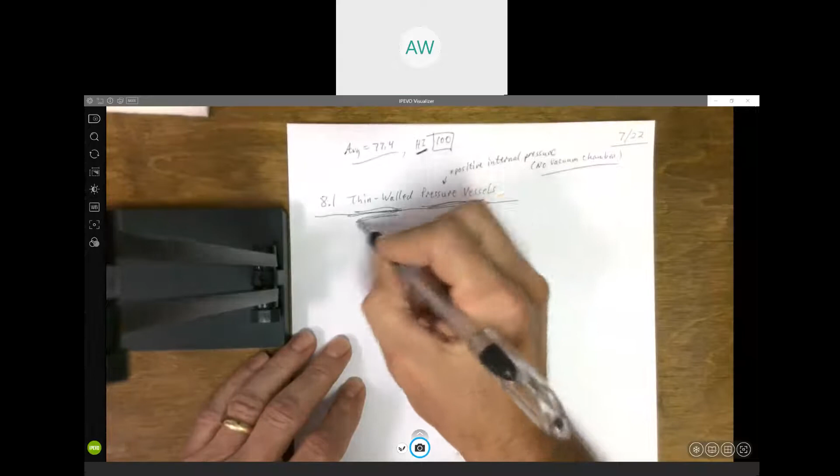Other thing, the formulas that we're going to come up with in just a minute only apply to what we refer to as thin-walled pressure vessels. These are pressure vessels where the thickness is much, much less than the size, the radius of the pressure vessel. In fact, I think this particular textbook uses the ratio R over T, and it's got to be greater than or equal to 10.

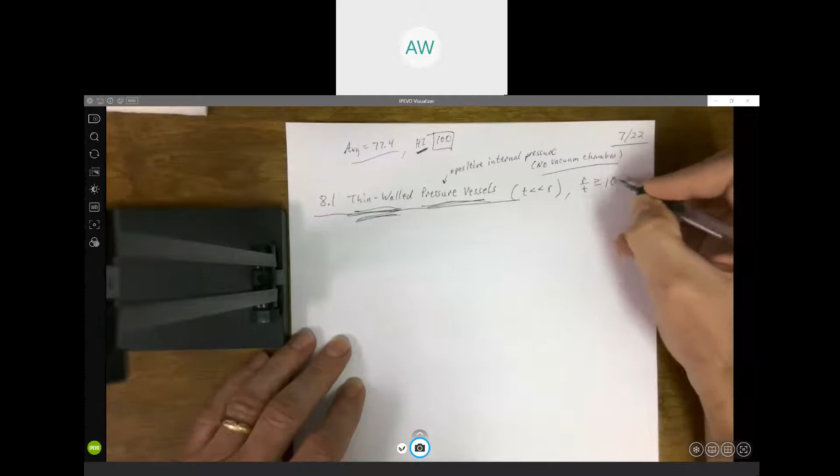So we'll see in a minute, R here is the inner radius of this pressure vessel. It's got to be at least 10 times the thickness for these formulas to apply. And in fact, I think there's discussion in the book about this.

I think the whole purpose in limiting ourselves to thin walls is that if the wall is really thin compared to the size of the pressure vessel, the stress doesn't change much from the inner surface, the inner wall, to the outer wall. If you start getting really thick wall, then there is a significant difference between the stress on the inner wall and the outer wall. And those types of pressure vessels are analyzed differently than the formulas that we're going to come up with and use.

But most pressure vessels are thin-walled, meeting this criteria, because we'll see in order to keep the stresses below our allowable, the thickness doesn't have to be that great. A really thin wall can withstand a great deal of pressure. And these are very common types of structures.

You see pressure vessels all over the place. If you've got a gas grill with a liquid propane bottle, that's a pressure vessel. If your house has gas, you've got a big gas storage tank at your house, that's a pressure vessel. If you live in town and just have gas lines, well, turns out any kind of piping is just a long cylindrical pressure vessel. So piping and cylindrical pressure vessels are essentially the same.

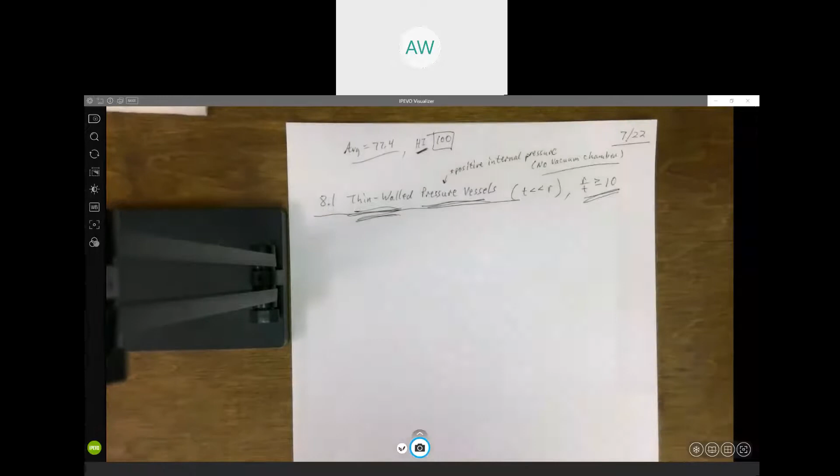You're going to see we're going to come up with some really nice, short, easy formulas that we can use to calculate the stress in these pressure vessels. So I mentioned we're going to look at two. The first one we're going to talk about is cylindrical.

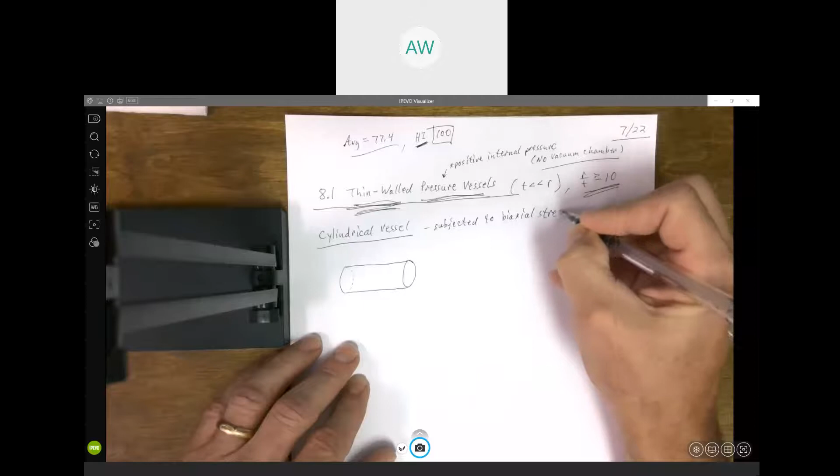So as the name implies, it's a pressure vessel that's shaped like a cylinder. Now, we're going to see with all these pressure vessels, these things are subjected to what we call biaxial stress. So that implies there's stress in two directions, right? We're going to have stress in two axes.

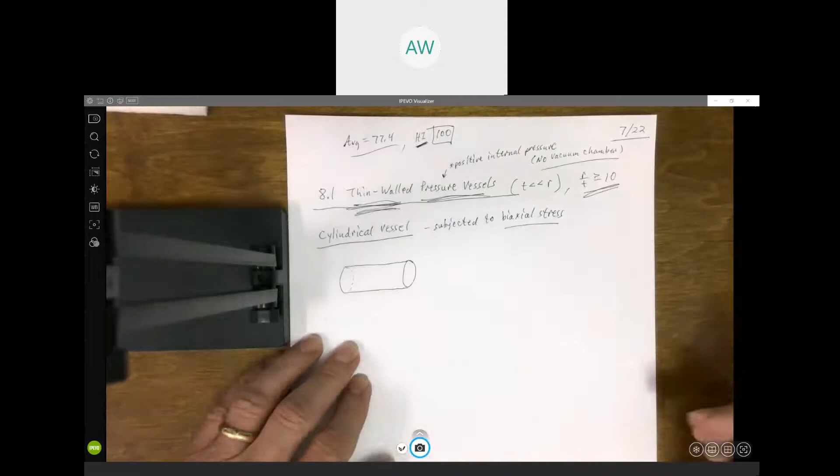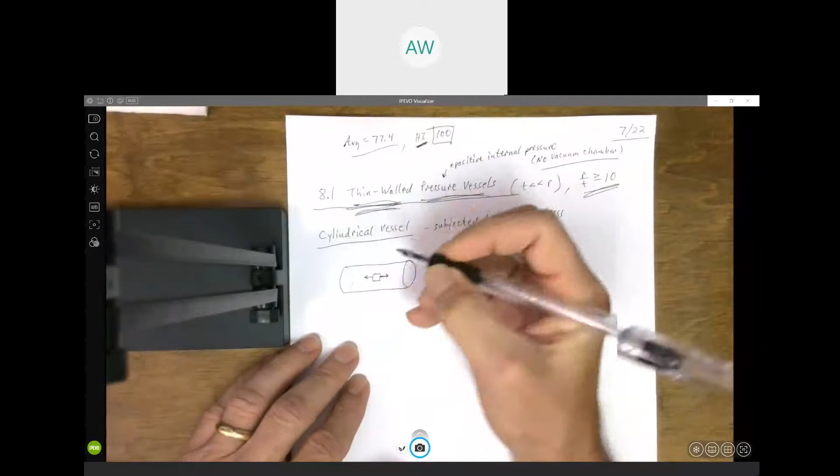And so if you looked at a little element, a little piece of the side of this pressure vessel, you're going to see a stress in the axial direction. We'll denote sigma A. This is the axial, or the stress in the longitudinal direction.

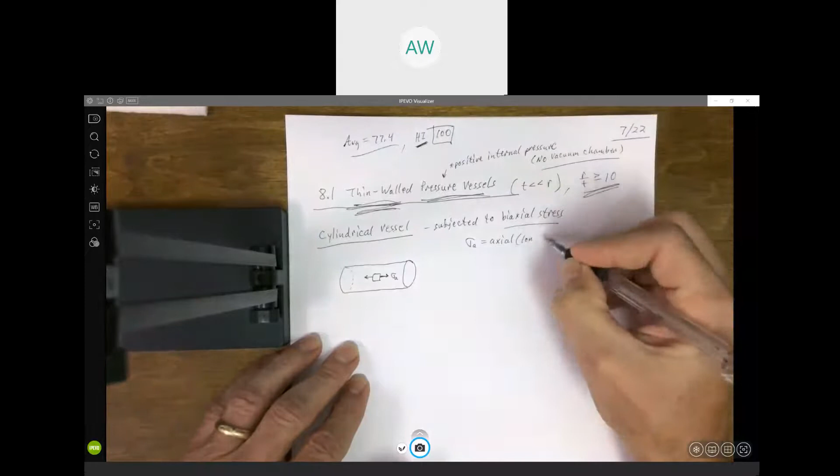If you got a cylindrical vessel like this and you put pressure in it, that pressure is trying to pull this thing apart this direction. You got pressure pushing to the left, you got pressure pushing to the right. It's trying to basically pull this thing apart longitudinally. And the stress in that direction, we're going to call the axial stress.

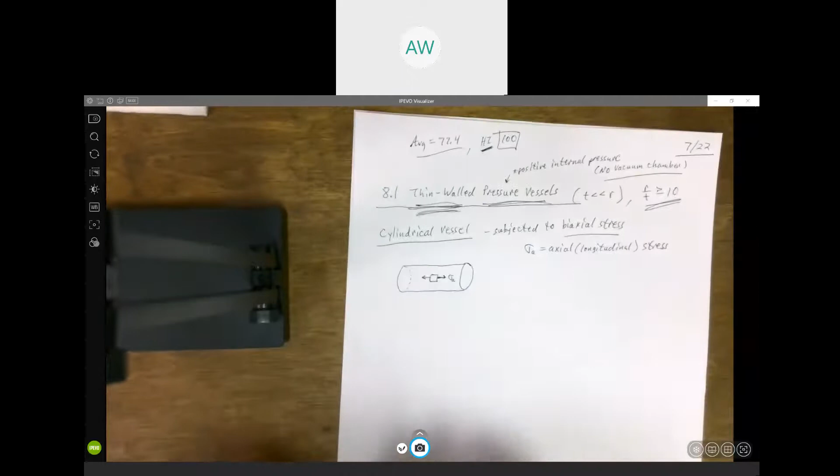But if you have pressure in here, it's also trying to, maybe I'll use two hands, blow it apart in this case, the way my picture's drawn, in the vertical direction. You got pressure in here, it's trying to basically push that top up and push the bottom down.

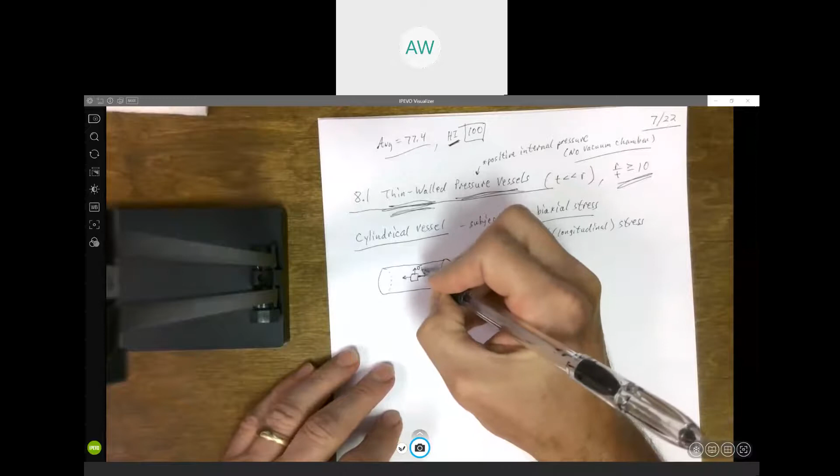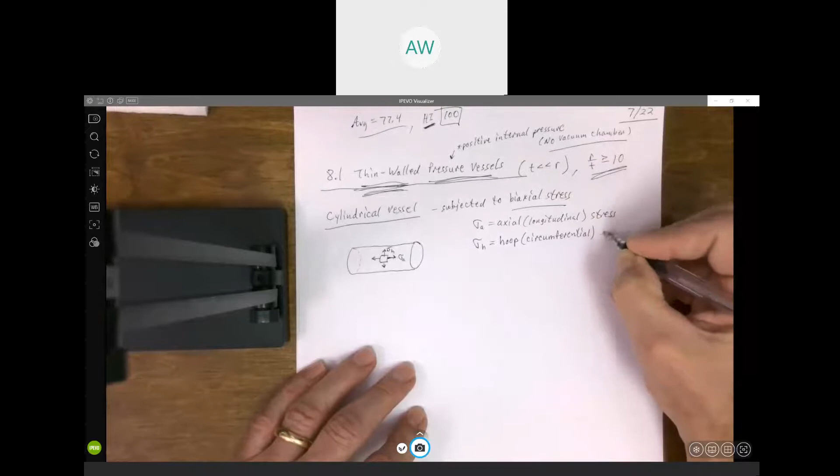And that stress, in what would be referred to as the circumferential direction, which is very long and hard to say and hard to write, so this is typically referred to as the hoop stress. But if you prefer, you can call it the circumferential stress. So when you put a pressure inside this cylinder, it's trying to basically blow this thing apart in two directions. And these two stresses, that's what we're going to try to come up with a formula that will allow us to calculate those stresses in the longitudinal direction and the circumferential direction.

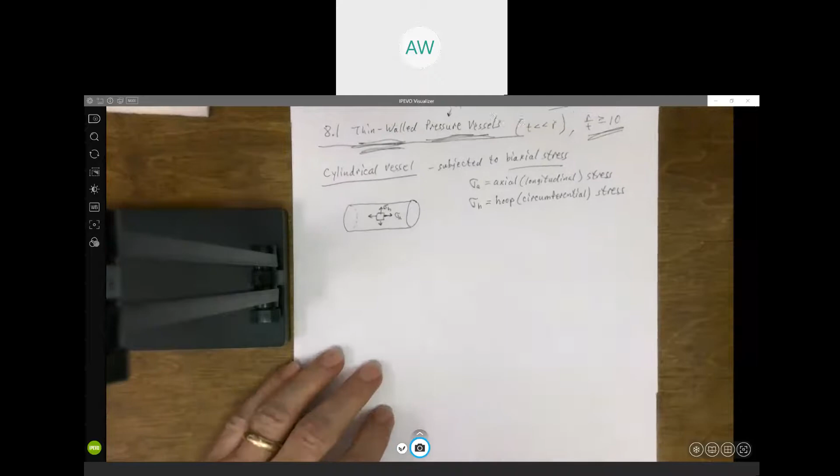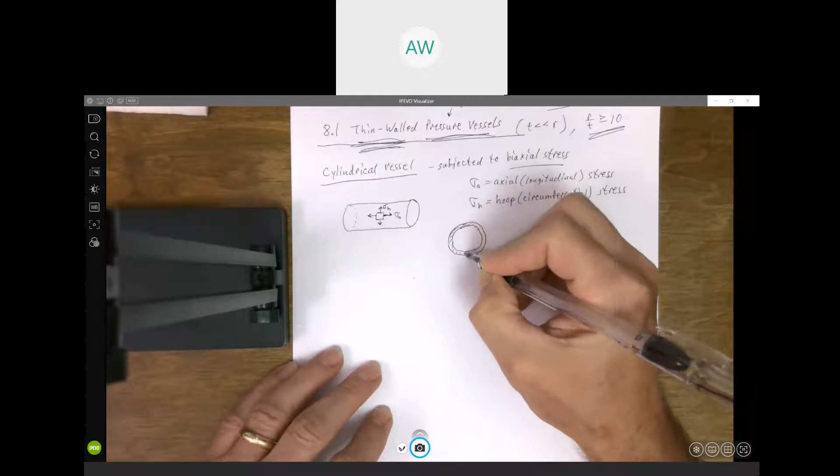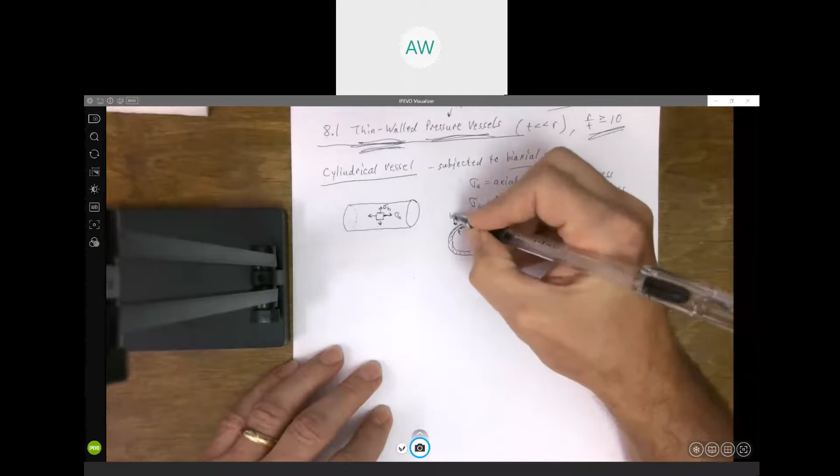Now, here's where the thin wall part of this comes into play. If you look at the cross section of this cylinder, we're going to have the inner radius we're going to denote with R. The wall is going to have some thickness T, and this would be the area of the wall.

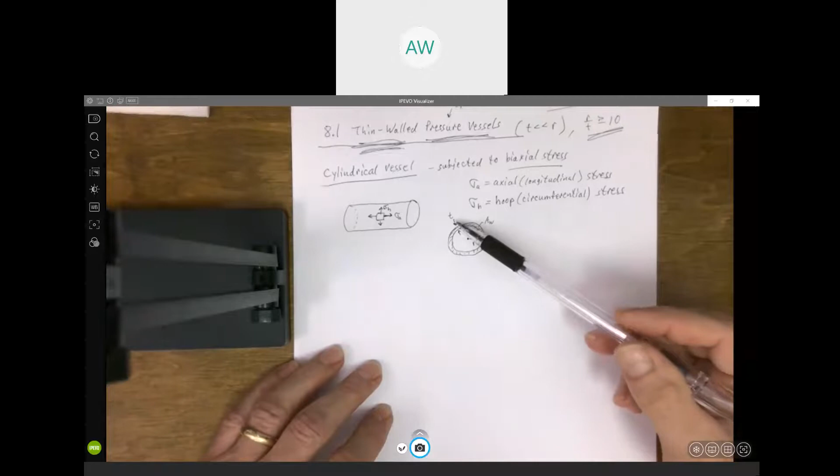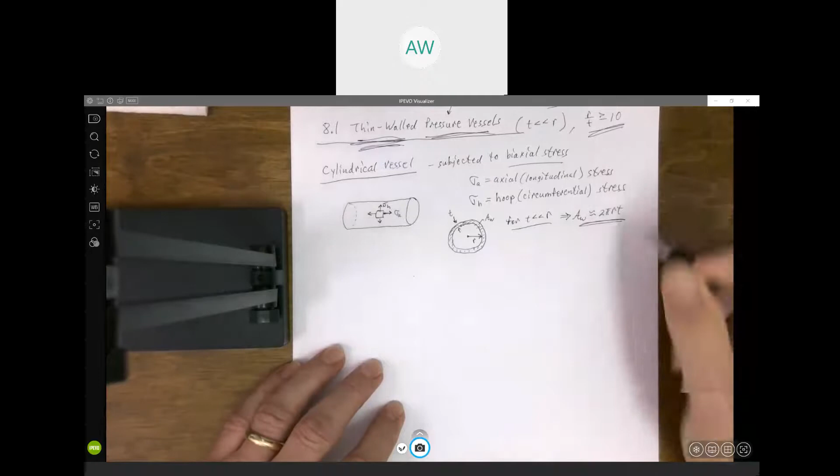Now, to get the actual area of that wall, what you could do is take the area based on the outer radius and then subtract the area based on the inner radius, and the difference would be the area of that wall. But here's where, if the thickness T is really small compared to R, then we can approximate. So if we've got a thickness that's much, much smaller than the radius, the area of the wall is going to be approximately equal to the circumference of the inner circle times the thickness, or just 2 pi r t. This formula we're going to come up with is based on this assumption, this approximation. That's why the formulas we get start to break down as the thickness gets bigger.

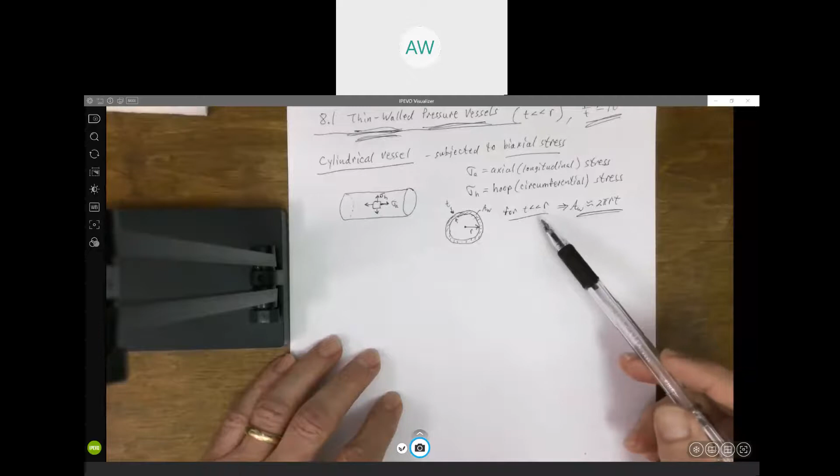Now, remember when we talked about normal stress, we said normal stress was F over A, I'm using F instead of P because P here we're going to start using for pressure. But we could get the force by multiplying the stress times the area. We've done that a couple of times when we were deriving some other stuff. So if you've got a stress acting over a surface area, then the equivalent force associated with that stress is just the stress times the area that it acts on. So it's exactly what we're gonna do here.

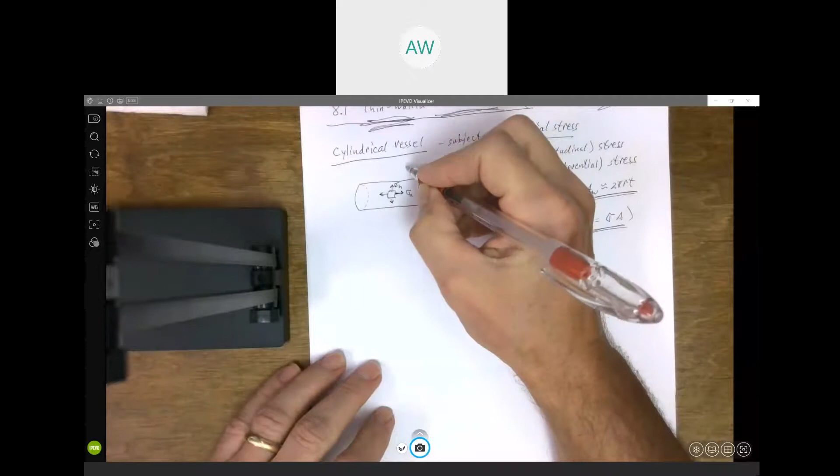We're going to cut this cylinder, if we cut it in this direction... drawing circles are hard, especially when they're hard for me. So I'm cutting this, and I'm looking at the right side of where I cut it. So we've got this, this is the area of the wall, and that's where we're going to have this axial stress.

We're going to have this normal stress, sigma A, acting on that area. So the force associated with that, I'll call force sigma, force due to stress, would just be whatever that axial stress is times the area of that wall. That's the force associated with that stress.

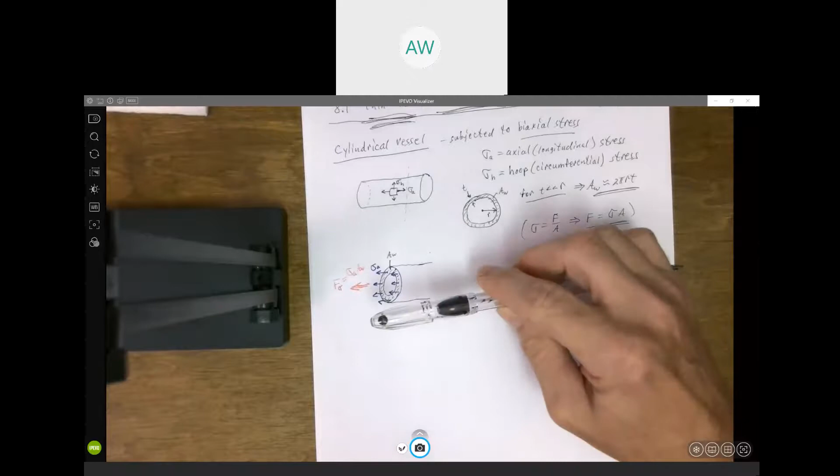Now back here on this back end, if you've got a cylinder, I can rotate it this way so you can see this end, but then you couldn't see the bottom surface. Or I could rotate the other direction and you could see this surface but not that one. That's what happens in reality, but I want you to be able to see both surfaces. I know somebody's thinking there's no way we could actually be seeing both ends of this thing. I'm agreeing, but I'm drawing it so we can see both ends for visualization purposes.

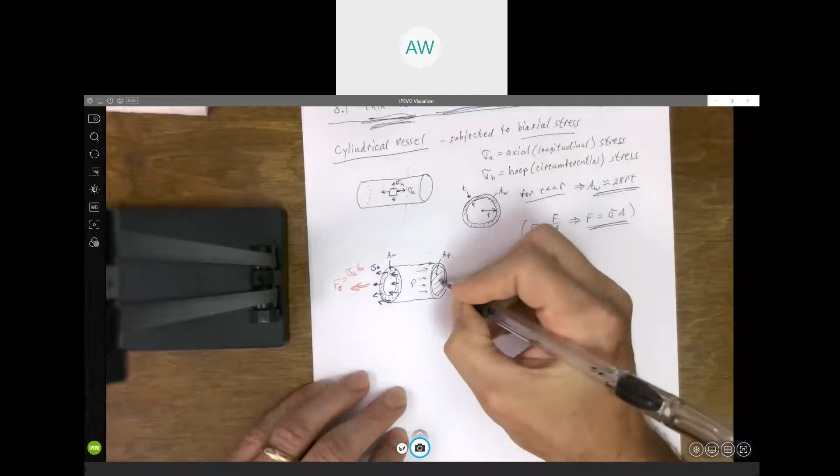On this end, what we've got is this internal pressure pushing on this thing, and that pressure is pushing on this area. Remember this thing's got radius r. The force associated with that pressure, again you learn this in physics when you study pressure, you've got a pressure acting on a surface, the force is just the pressure times the area that the pressure is pushing on.

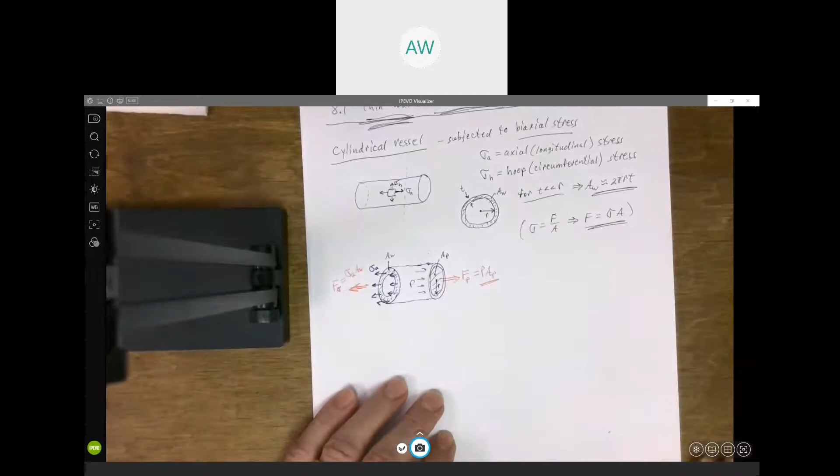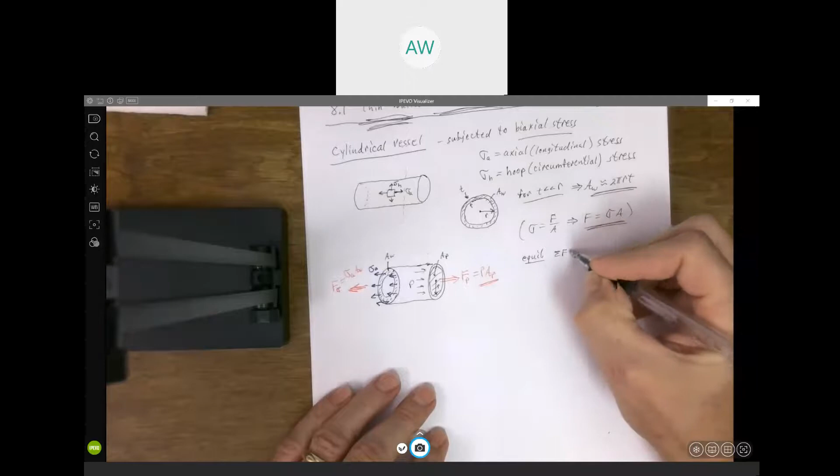Well, we know if this is in equilibrium, forces have to add up to zero. So if sum of the forces equals zero, then the force due to the stress has got to equal the force due to the pressure. So I just set those two equal and we solve for stress. This is going to be the normal stress times the area of the wall, equal to the pressure times the area the pressure is acting on.

We're going to use our approximation from up here for the area of the wall, 2 pi RT. And the area that the pressure acts on is just the circular area, which is pi r squared. Pi's cancel, one of the r's cancel, and when you solve for the axial stress, you get PR over 2T.

So not a super complicated derivation of where this formula comes from. Remind you here that P is the internal gauge pressure, R is the inner radius, T obviously is the wall thickness. And so that's our first formula. If we want to know what the axial stress is in a cylindrical pressure vessel, very simple, it's just PR over 2T. So if you know the pressure, the inner radius, and the wall thickness, you can calculate that axial stress. Any question about this formula?

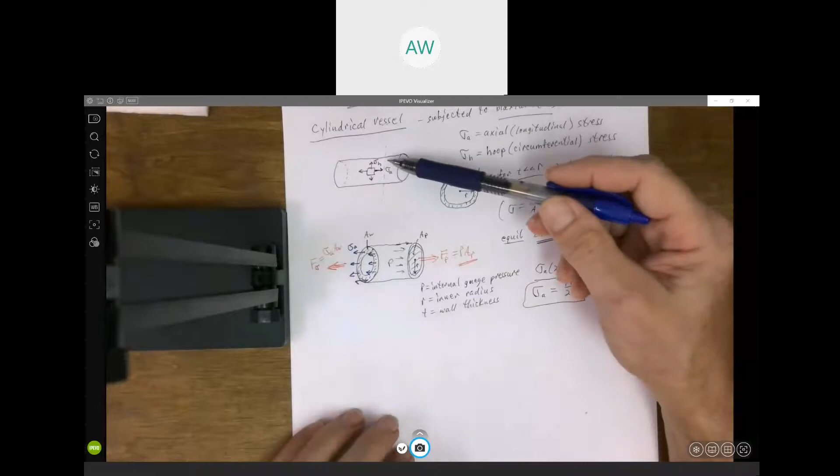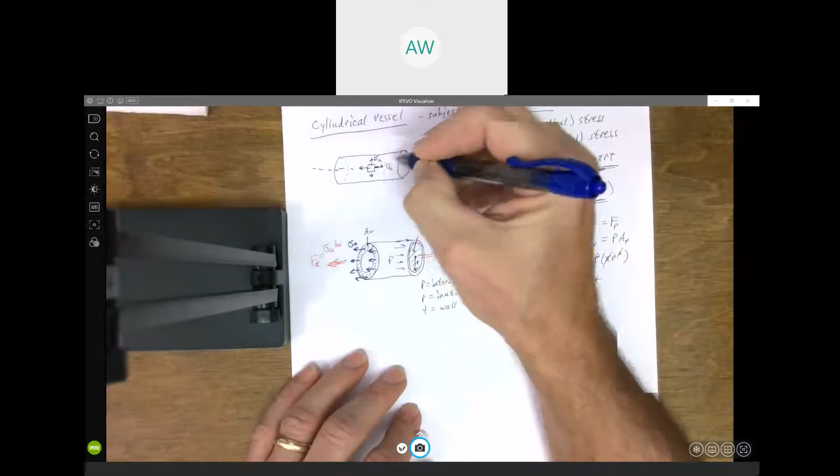Well, we're going to do a similar exercise to come up with the formula for the hoop stress, the stress in the opposite direction. Now how we're going to do that is we're going to cut it the other direction. Picture, if you will, slicing our cylinder lengthwise instead of chopping it in half across the cross section. We slice it longitudinally, and probably the most challenging part of this is going to be for me to draw this picture. I'll try to draw a 3D picture depicting our cylinder.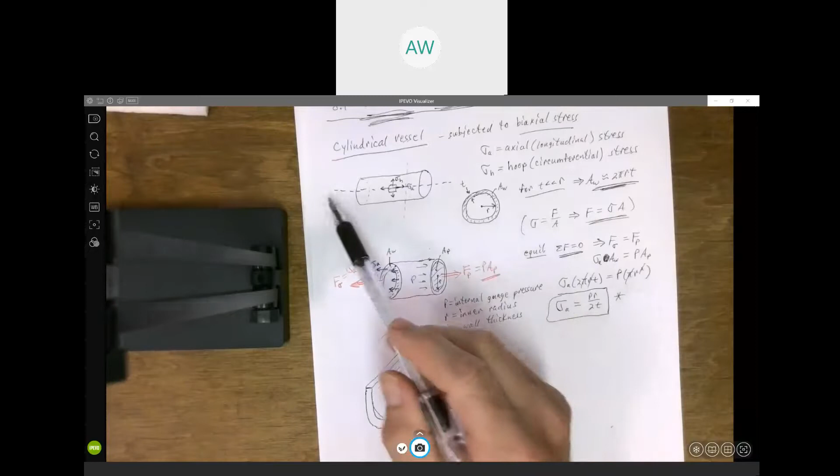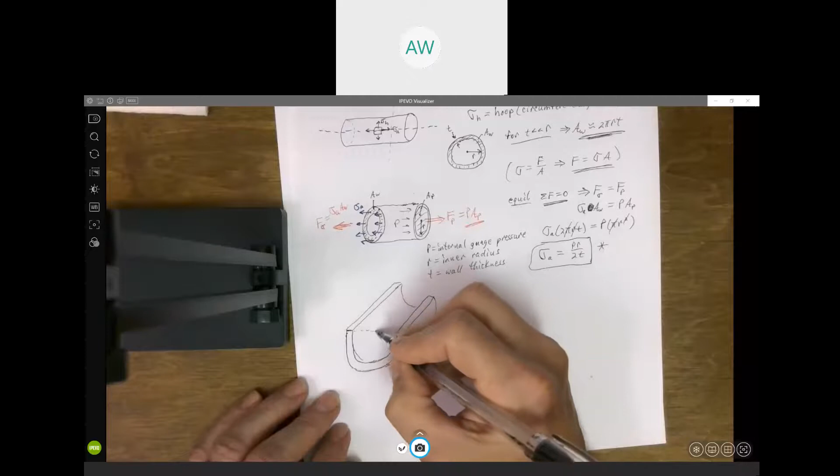Ooh, that's not a super great circle, but we'll go with it. That's if we took this cylinder and sliced it lengthwise. Now it's going to have some length L, and this distance across here, this would be 2R. Remember, R is the inner radius. So that distance would be 2r across there.

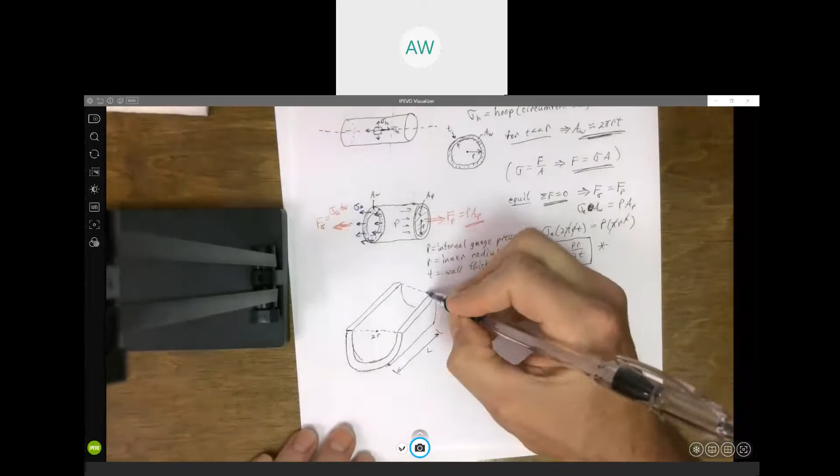Well, just like up here, we had this axial stress acting on the wall. Right here, we're going to have that hoop stress. So that's the normal stress that's acting on that wall, which I remember has some thickness, T thickness. Right, so you've got this pressure.

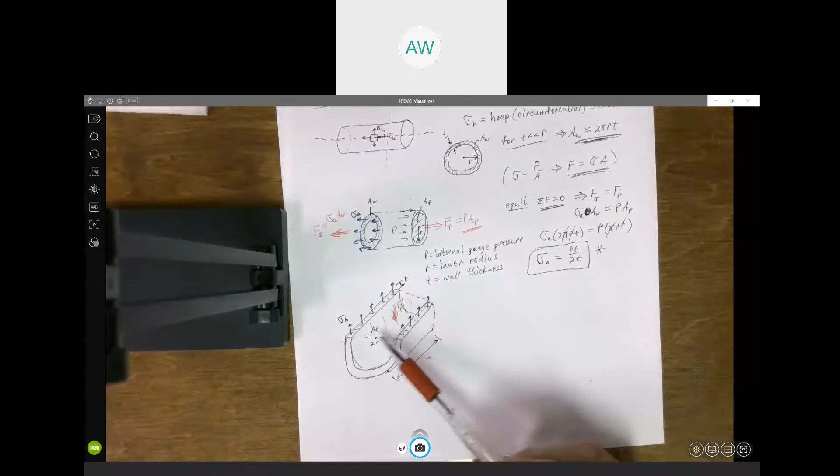You've got this pressure that's pushing down on this big rectangular surface. So you're going to have the force that the pressure is pushing down is going to be equal to the pressure times that big rectangular area. And then you're going to have the normal stress in the wall, an equivalent force due to the stress.

In fact, it might help, or might be a little clearer, if I do this in 2D. I can do much better in 2D if we just look at a 2D picture at the end of this thing.

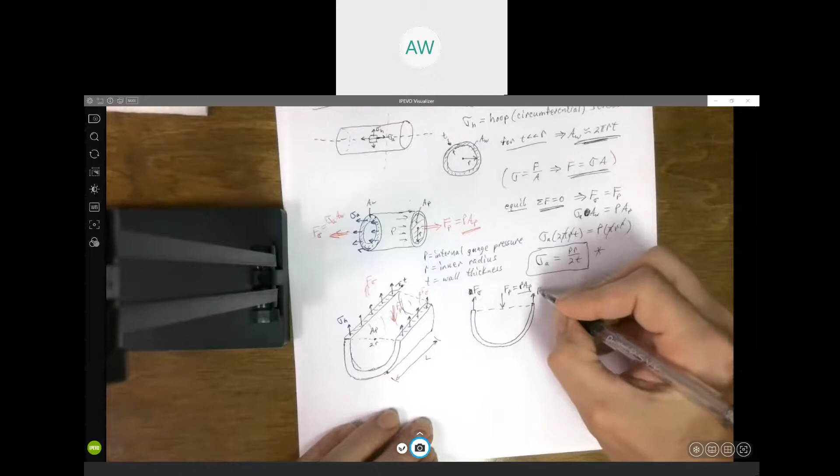Again, we've got the force due to the pressure equal to the pressure times the area that the pressure acts over. And then we're going to have a force due to the hoop stress in each of those two walls. The magnitude of each of those is going to be the same, whatever the hoop stress is times the area of the wall here.

I'm going to put a little prime just to distinguish this from the area of the wall up there. It's a different area. So we'd have the hoop stress.

We're going to do exactly the same thing we did before. We're going to set them equal to each other. The sum of forces has got to be 0. So here, I've got 2 of these forces due to the stress, and it's got to be equal to the force due to the pressure. So the force due to the stress is equal to the hoop stress.

Now, the area that it acts on is T times L. So this is the hoop stress times TL. That's what the area of the wall is equal to, whatever the thickness of the wall is times the length. So plug that in.

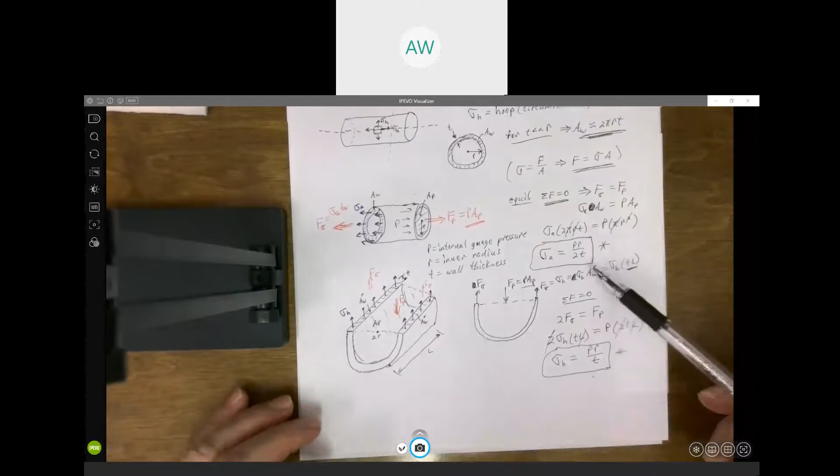One note here, you might have noticed this, but if you look at these two things, they're very, very similar. In fact, they're almost identical. The difference being the axial stress is PR over 2T, and this is just PR over T. So the hoop stress is twice as large as the axial stress.

So this is why the hoop stress is going to govern the design if we're designing this pressure vessel. In other words, if you're trying to decide what's the maximum pressure you can put in this vessel, or what the minimum thickness has to be, the hoop stress is going to determine that, because it's twice as large as the axial.

If this cylindrical pressure vessel fails, if you put too much pressure in there and it bursts, it's going to fail due to the hoop stress. So if you've got a cylinder and you put too much pressure in there, if it bursts or fails, ruptures, whatever term you like to use, it's going to be because of the hoop stress.

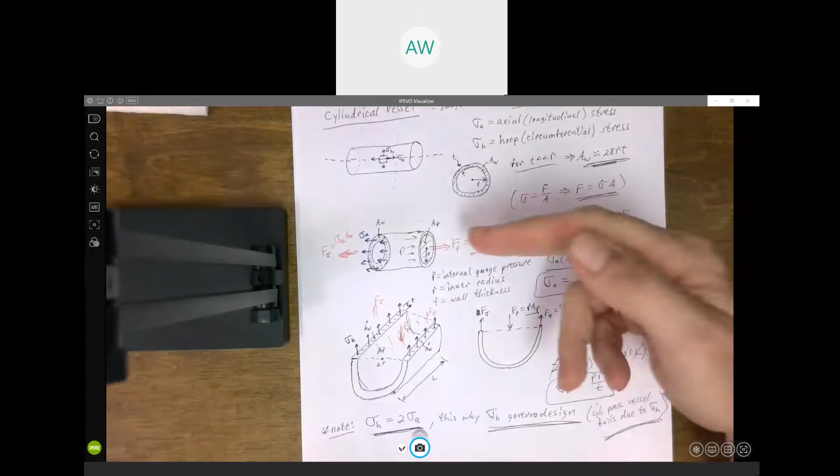It's going to split open. If you go back to the original picture, it's going to split apart this way, not longitudinally. It's the same material, so that material is going to fail whenever it reaches its ultimate strength, and it's going to reach it in the circumferential direction way before it reaches that stress in the axial direction.

In fact, there's a very good picture in your book. Let's see if I can put this up here, and we'll see how this works.

All right, so again, they're testing our fire alarm system. I don't know if the microphone's picking that up or not, but if it is, ignore it. Don't worry, nothing bad is happening. I don't have to evacuate the building.

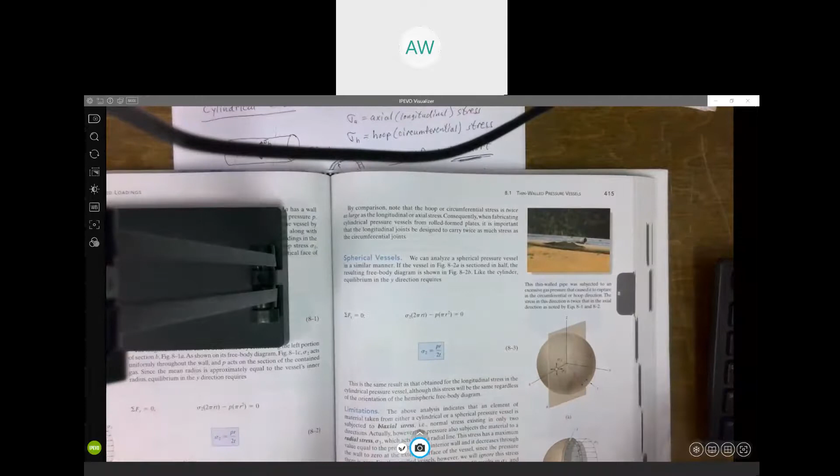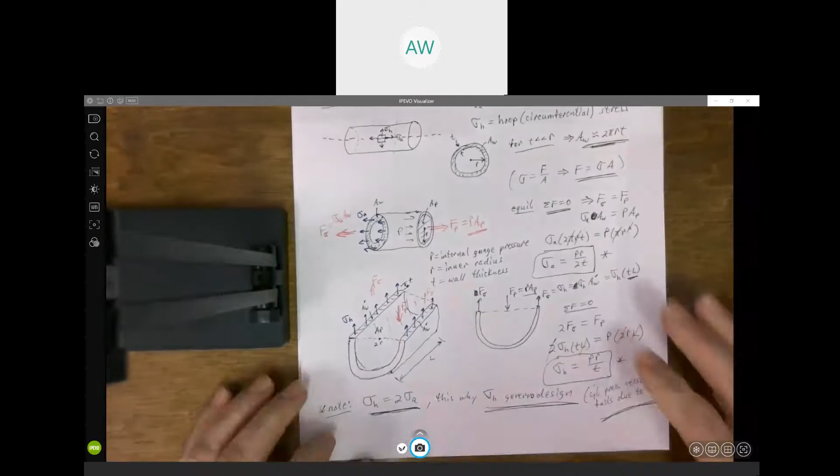Anyway, so nice picture there illustrating how the cylindrical pressure vessel is going to fail due to the hoop stress. All right, so anything else related to these two formulas in cylindrical vessels?

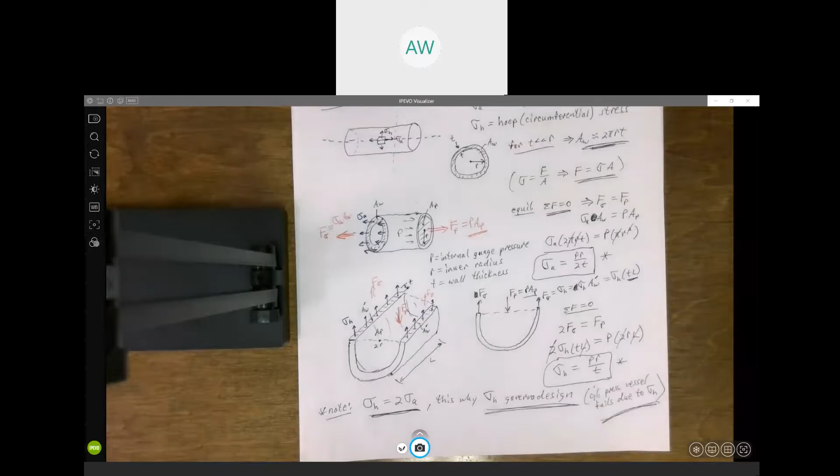All right, no questions. Then I got to get a new sheet of paper, and we'll talk about a spherical vessel. Again, two most common types of pressure vessels you find are cylinders and spheres. And in fact, well, I'll come back to that in a minute.

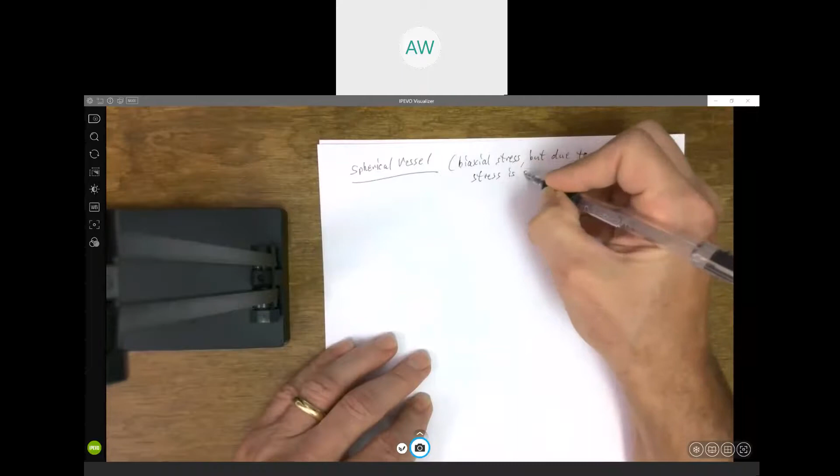But a spherical vessel also is going to have biaxial stress. But due to symmetry, the stress is the same in any direction. I can't draw a 3D sphere here, so just use your imagination. I can draw a circle, or kind of a circle, but picture in your mind a big spherical pressure vessel.

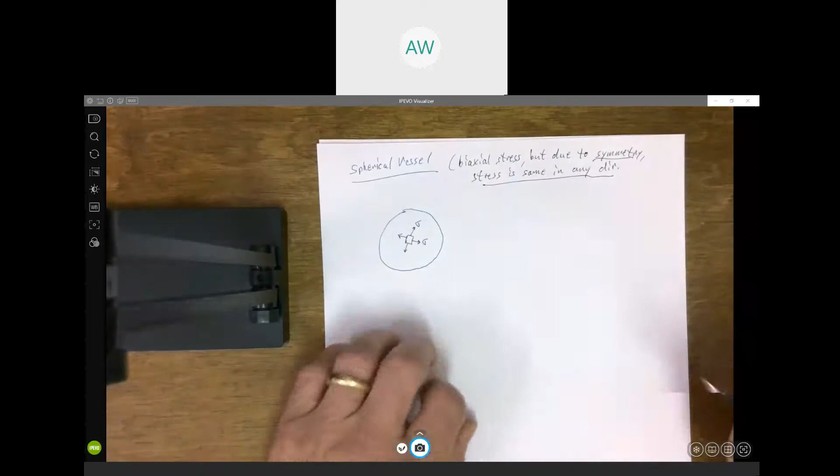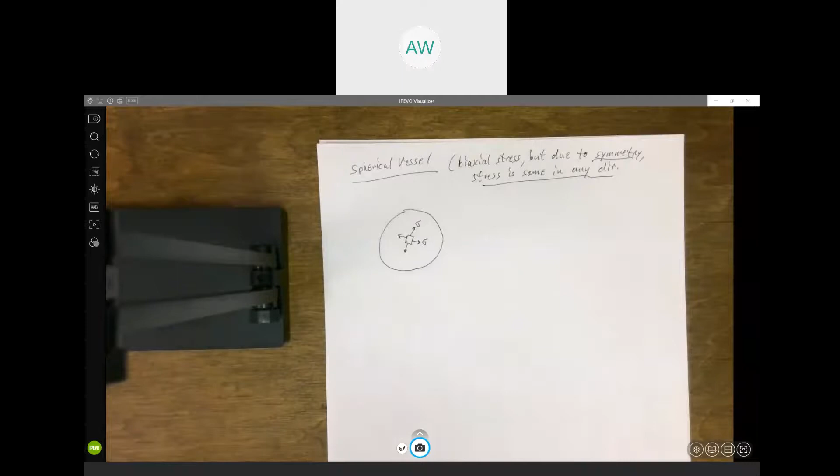Again, you just take some arbitrary little piece of that wall, and it's going to be exposed to this biaxial stress, just like the cylinder was. But due to symmetry, it doesn't matter how you cut this sphere, every cross section is the same, and so the two stresses are going to be equal to each other. How we can get a formula for that is very similar to what we did before.

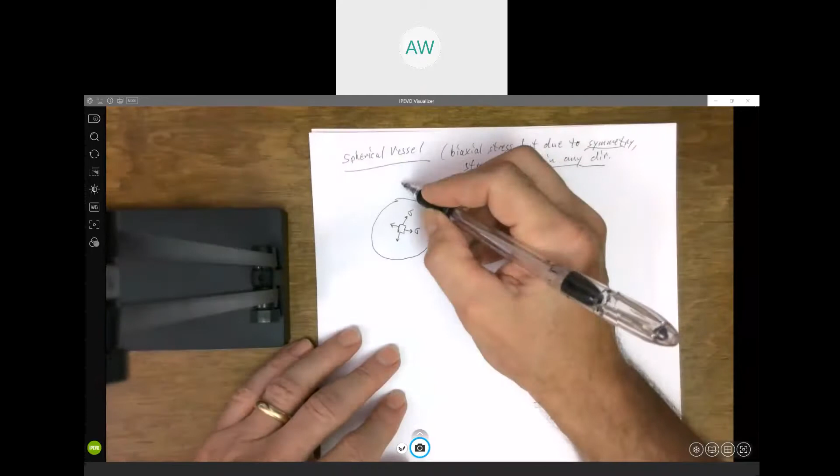If I cut this sphere, and we're just looking at this -- not real circular, pretend like it's cut in half and we're looking at one half of it -- we've got this normal stress acting on this wall, we'll call it sigma. Again, this area of the wall is the same as it was the first time we cut a cylinder, right, the wall there we're approximating is 2 pi R T.

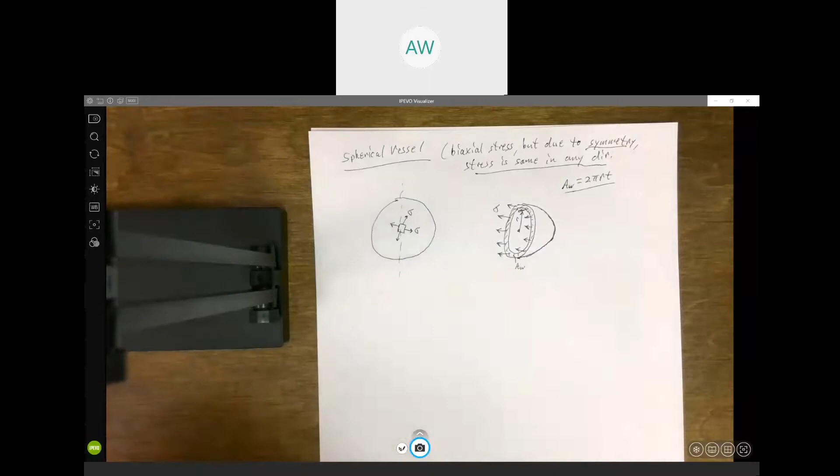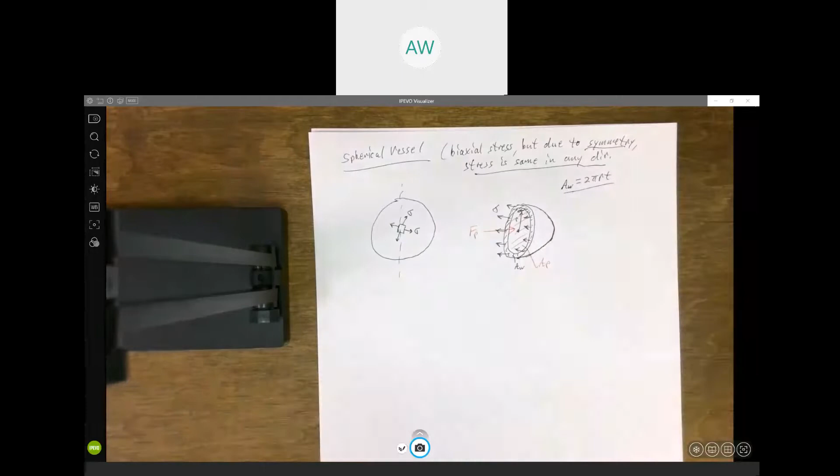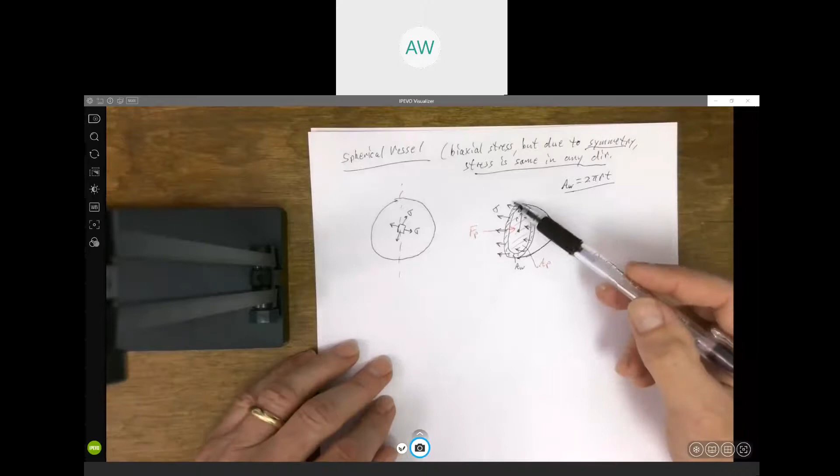We've got some inner radius R. We're going to have the force due to the pressure acting on that area, so that would be the area the pressure acts over. So the force due to the pressure is going to be equal to the pressure times that area. Force due to the stress is going to be equal to the stress times the area of the wall.

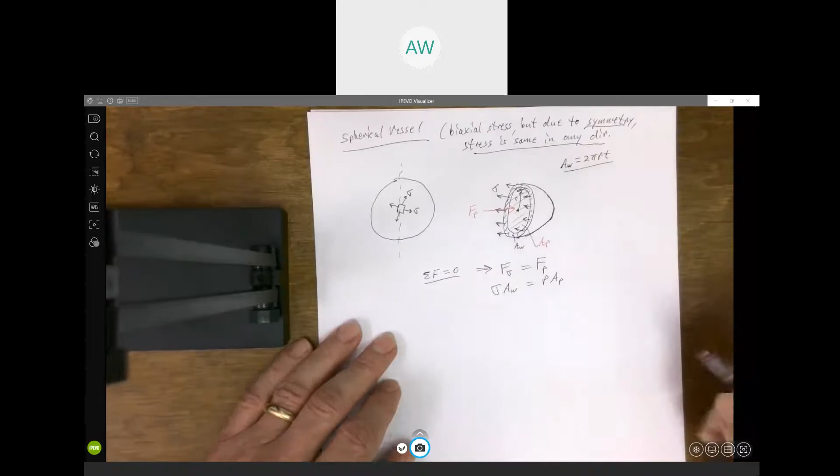Like we did before, it's in equilibrium, sum of the forces equals 0. The force due to stress has got to equal the force due to the pressure. This would be the stress times the area of the wall, this would be the pressure times the area the pressure acts over. The area of the wall is 2 pi R T, the area the pressure acts over is just the area of that circle, which is pi r squared. The pi's cancel, the r's cancel, and what we wind up with for a sphere is P R over 2T.

Same as it was for the axial direction of the cylinder. All right, any questions about this formula, how we get the normal stress in the wall of a spherical pressure vessel?

All right, so now we got our formulas. You're going to like the problems, I think, in this section. Most of these problems are pretty short and easy. It's just basically using these 3 formulas that we just came up with. What will vary from problem to problem is what's given and what's missing, but it's mainly just applying those simple formulas.

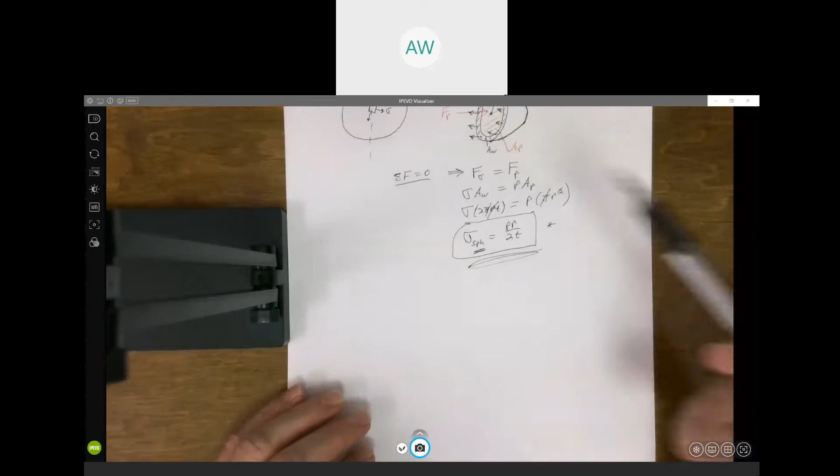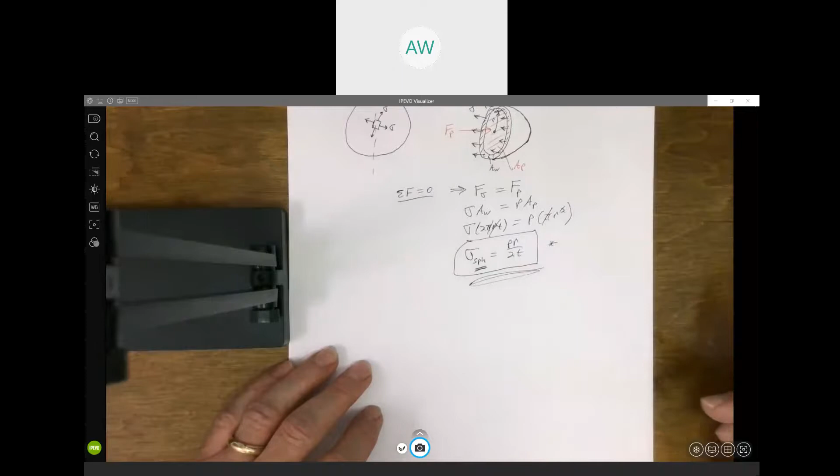Just point out one thing. I mentioned cylindrical and spherical are the two most common. Actually, a very common example -- you see these a lot with big propane storage tanks. You can actually make a storage or pressure vessel by taking a cylindrical part, and then people will usually weld onto it hemispherical end caps. Right, so you got a cylindrical part and you got a spherical part.

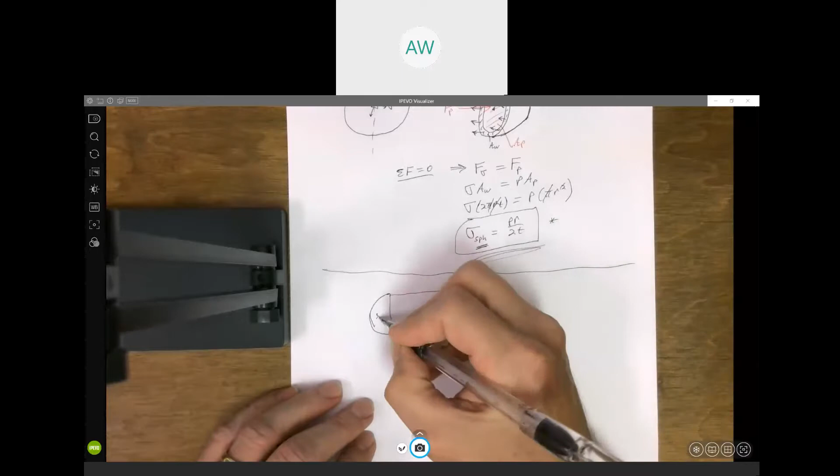And so you can get the maximum stress in the cylindrical section by using those first two formulas we came up with. So here you're going to have axial and hoop stress, that we did, in the cylindrical part. And you see a very common type of pressure vessel is you take a cylinder and two hemispheres and put them together, and you make a pressure vessel that looks like that. All right, any general questions about pressure vessels or these formulas before we solve a couple of problems?

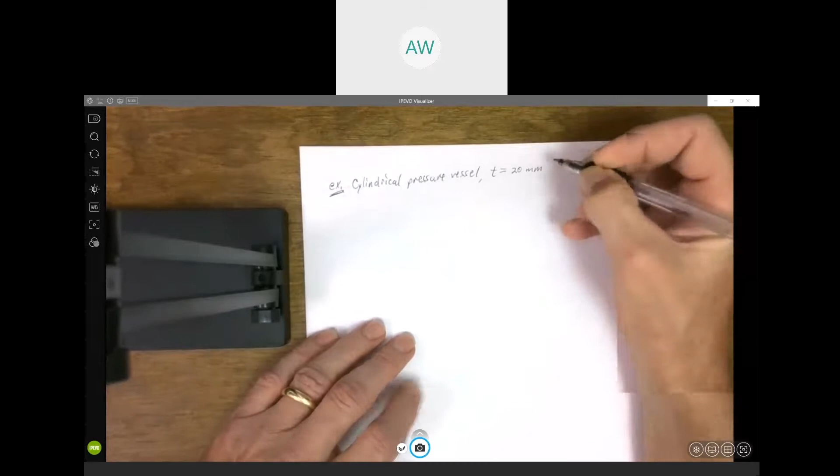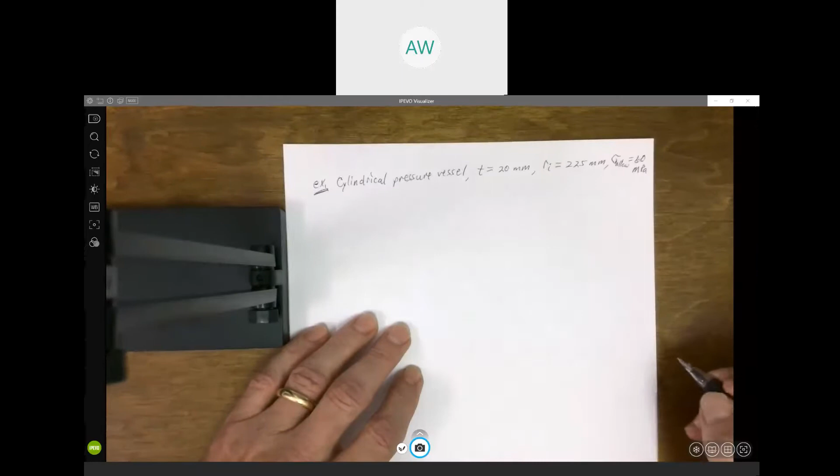All right, so let's do one. This first one we look at is a cylindrical pressure vessel. We're given the thickness is 20 millimeters, the inner radius is 225 millimeters, and the allowable stress is 60 megapascals. We want to find the maximum allowable pressure.

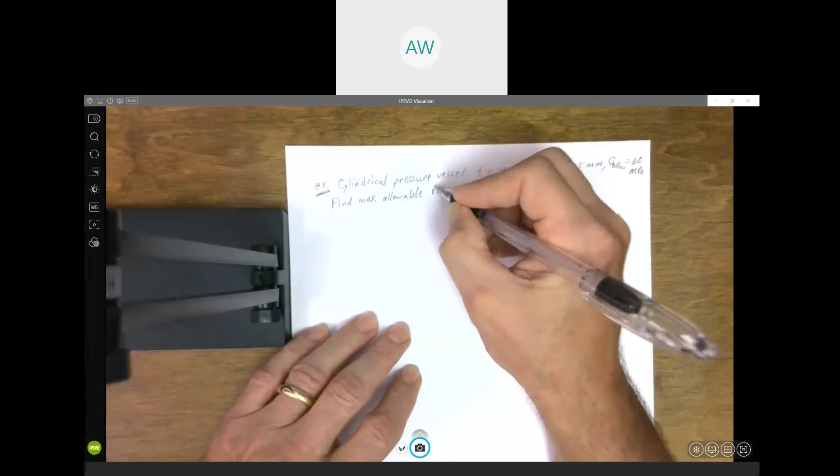All right, so we've got a cylindrical pressure vessel. We're given the wall thickness, 20 millimeters, and the inner radius is 225 millimeters.

Just to point out, initially we were looking at thin wall vessels where the ratio of R over T was at least 10. Well, this isn't much over 10, but the radius is a little more than 10 times the thickness, so this definitely classifies as thin wall. Whatever material it's made out of, this is our allowable stress — we cannot exceed that stress in the wall material.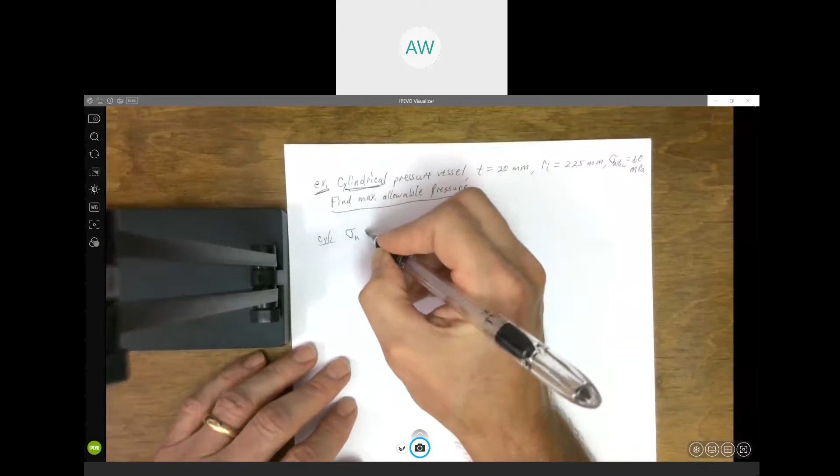So what's the maximum pressure we can put in there? Well, first, we're talking about a cylinder, right? So for a cylinder, remember that the hoop stress is twice the axial.

So hoop stress is what determines our maximum pressure.

Oh gosh, it's wanting to update. My computer was wanting to restart. We don't want that to happen right this minute.

All right, so our hoop stress is what's going to determine our maximum pressure. I know that the hoop stress is PR over T, so that's what we're going to use to find our maximum pressure. We're going to set the hoop stress equal to our allowable, and this pressure will be our maximum.

The radius, this is the inner radius, is 225 millimeters. Now, you might be thinking, do we need to convert this to... Michael, you can't hear me? Never mind, okay.

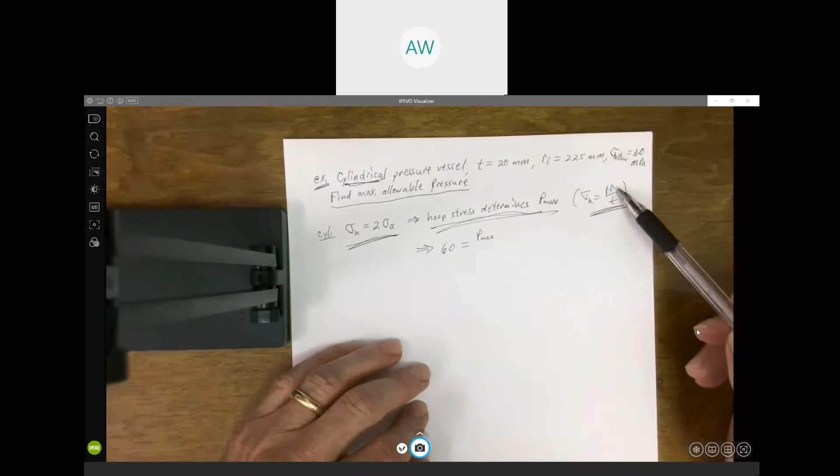The question was, do we need to convert this to meters? Not necessarily — as long as the radius and the thickness are in the same units, it doesn't matter. But it might not be a bad habit to convert into meters, that's fine: it'd be 0.225 meters. But if you do that, you also have to convert the thickness into meters, 0.02. Again, we could have left this in millimeters, since the units cancel, so it really doesn't matter as long as they're both the same.

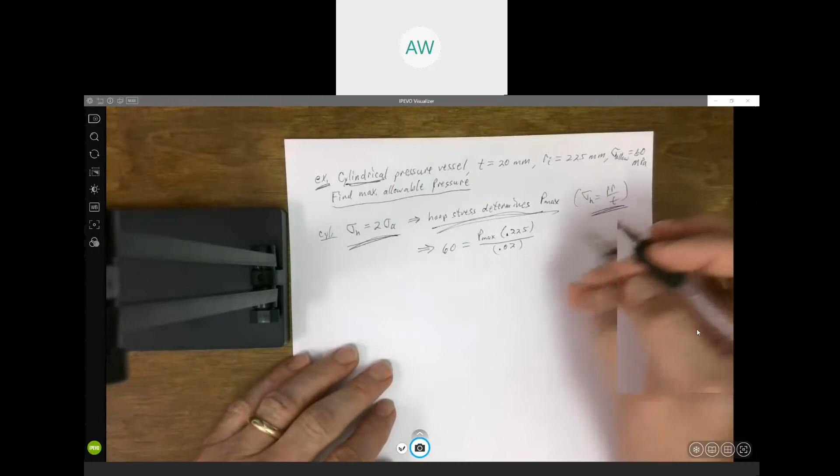And solving for Pmax, I got 5.33 megapascals.

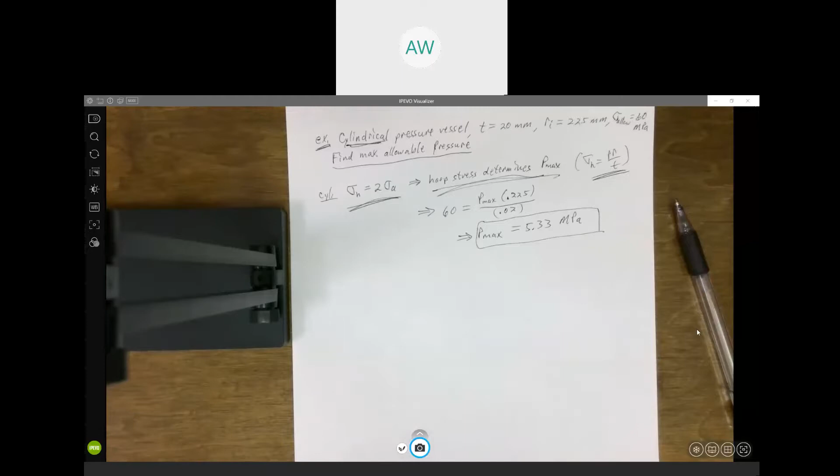Now, obviously this is in metric units, and personally I don't have any feel for what kind of pressure that is, or what 5.33 megapascals corresponds to in psi. I have no idea if that's really large or not so much low pressure. But that's the maximum pressure we could put in this vessel without exceeding our allowable stress.

Just to give you an idea of typical pressure values in English units — when I worked at NASA, I saw lots of pressure vessels. At NASA Marshall, in the test area, there are vessels storing liquid oxygen, liquid nitrogen, and hydrogen used to conduct shuttle engine tests. The largest one I can remember was a nitrogen vessel storing nitrogen at 15,000 psi — that's a pretty big pressure.

I also did a lot of work on some liquid oxygen storage vessels. There was one vessel designed for 5,000 psi, but they wanted to use it at 6,000 psi. So we did some analysis, modified a few things, and were able to use it at 6,000 psi.

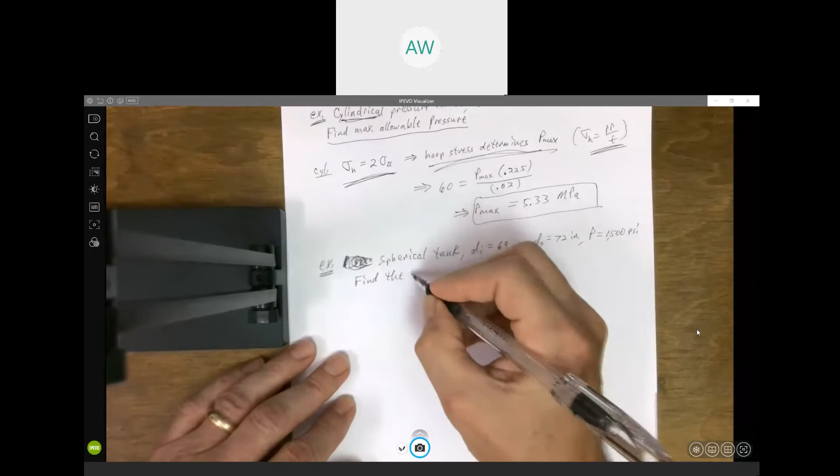Here we're given the inner diameter is 69 inches, the outer diameter is 72 inches, and our pressure is 1,500 psi. We want to find the normal stress

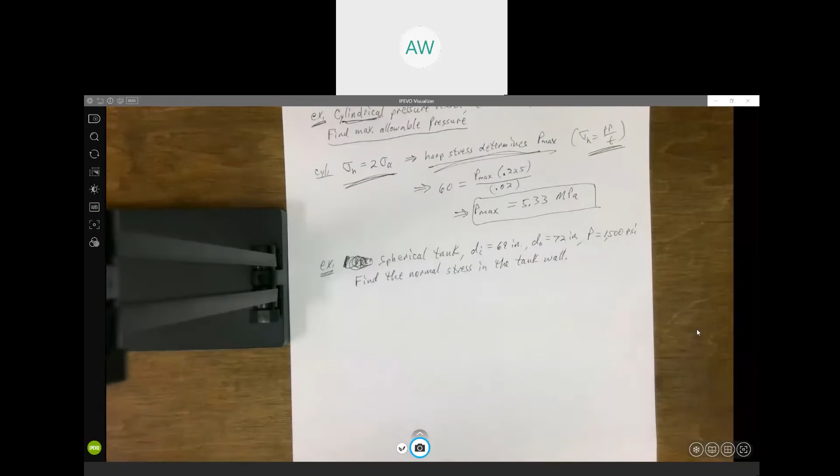in the tank wall. In the previous example, we were given the allowable stress and trying to find what the maximum pressure was. Here, we're given the pressure and dimensions of the tank, and we're trying to calculate what the stress is in the tank wall.

For a sphere, it's PR over 2T. This R is the inner radius, so that's the inner diameter divided by 2. So 69 divided by 2 is 34 and a half. Pressure's given, that's the R we're going to plug in here. So the only other thing we need is the thickness.

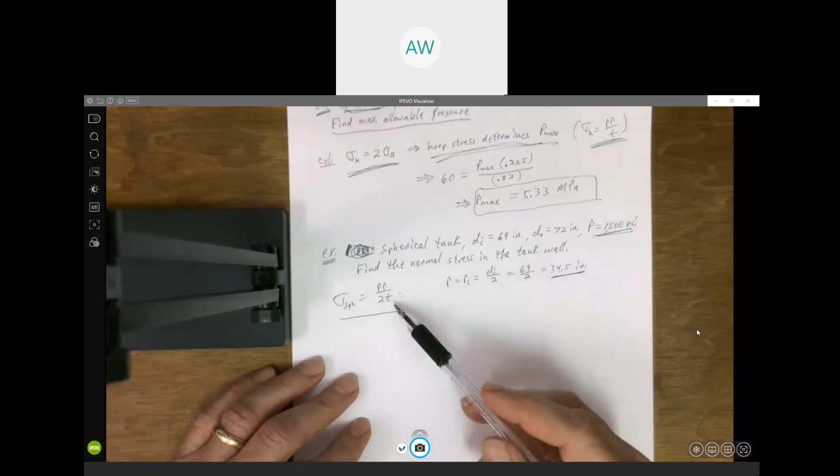Be careful here. It might be tempting to say the thickness is going to be 3 inches, taking the outer diameter minus the inner diameter as the wall thickness. Actually, the wall thickness would be half of that.

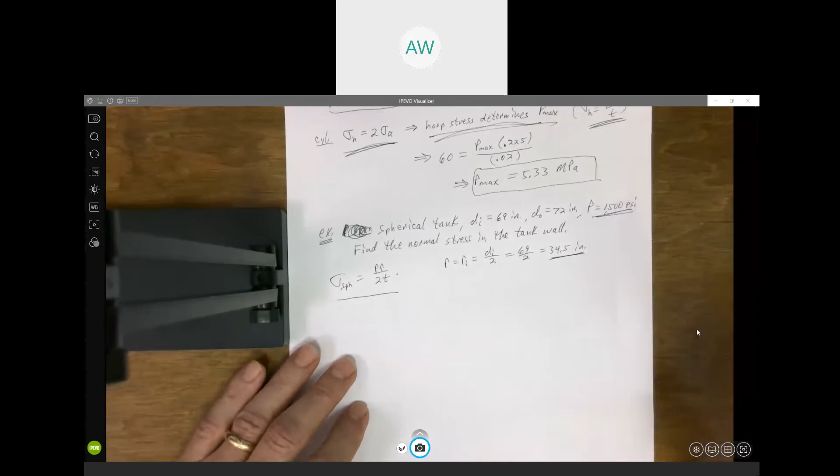A picture here helps. Pretend like that's a circle. The outer diameter, that's 72 inches. The inner diameter is 69 inches. But this is the thickness. So that thickness would actually be 72 minus 69 divided by 2, so it's 1.5 inches. That's our wall thickness, and so now we just plug it into the formula.

So we got the pressure, 1500 psi. Again, we want these dimensions to be the same - they're in inches already, so we're good there. 34.5 inches over 2 times 1.5 inches, and I got 17,250 psi.

So that would be the stress in the wall of this spherical tank. And then, depending on what the material is, we'd go check and make sure that doesn't exceed the yield stress, and definitely hope it doesn't exceed the ultimate stress. Or if it does, this thing's going to burst open and fail. But that's the stress in that wall, that spherical tank. Any questions about that?

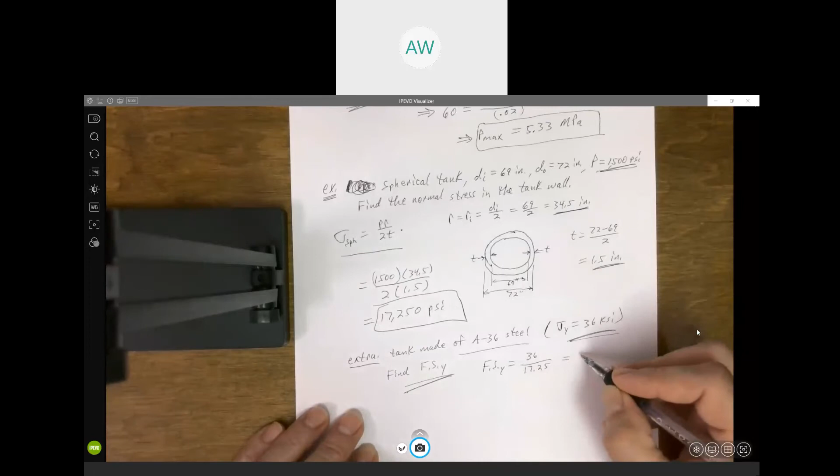To get the factor of safety, we just take what the yield stress is and divide by what the actual stress is. This is in PSI and that's in KSI, so we need to convert both to the same units, we'll just go KSI. So this would be 17.25, and we got a factor of safety of a little over 2.09.

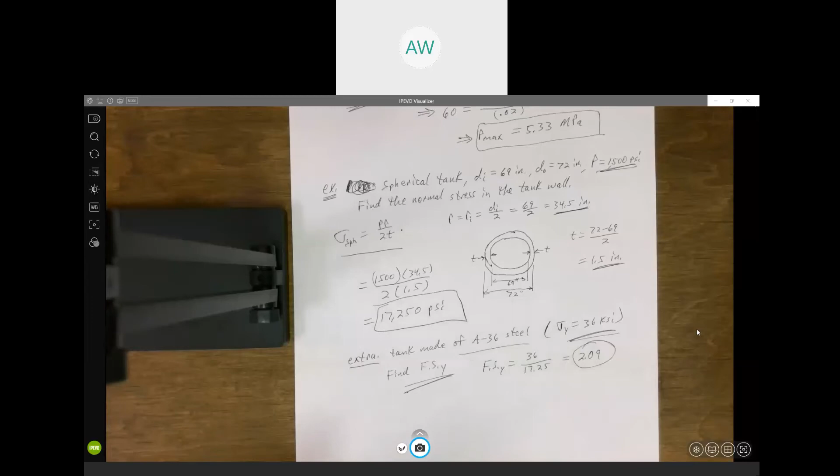I'll point out there's several national standards. There's ASME, the American Society of Mechanical Engineers, that's a pressure vessel code, a big 3-ring binder full of stuff about pressure vessels. There's also a piping code called ANSI, the American National Standards Institute for piping. Both of those require a factor of safety of 2 on yield. So this would satisfy the ASME pressure vessel code, this particular vessel, if it was made out of A36 steel.

So anything else you got questions about related to pressure vessels? Tomorrow we're going back to beams again. We're going to combine - first we looked at axial loads, then we looked at bending, and if you remember all these problems when we were bending stuff, we were just bending it, no axial loads. Well, what we're going to do tomorrow is start looking at combining those two. This will be in the next section in your book. That's where we're headed tomorrow.